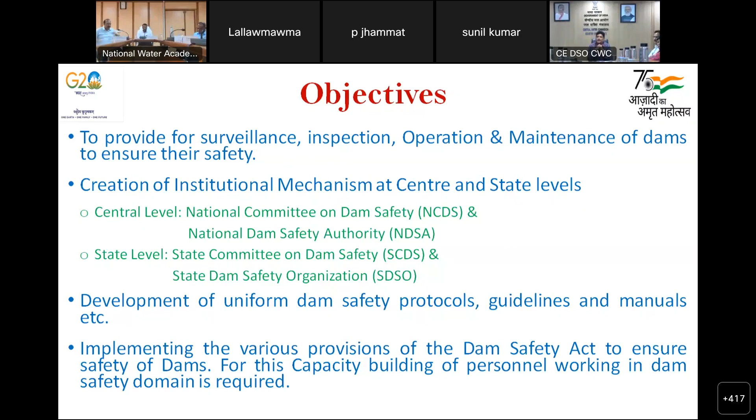And this will be required because we have more than 6,500 specified dams in the country. So the needs are also huge. So this being the objective, the preamble of the Dam Safety Act is simply: it's an Act to provide for surveillance, inspection, operation and maintenance of the specified dams. I will come to what is the meaning of specified dams. There is a definition in the Act which differentiates the specified dam and the non-specified dam.

Next, please. Basically, I want to take you through the Act very briefly, and the Act is available in the public domain; you can all access the Dam Safety Act 2021 on the net. However, I will tell you that there are 11 chapters and 3 schedules, and these 11 chapters have 56 sections. Chapters 1 to 6 are about the institutional mechanisms, both at the central level and at the state level, sections related to those.

Chapters 7 to 9 are about the various provisions which have to be followed, and the last 2 chapters, number 10 and 11, are miscellaneous provisions regarding offences and penalties, etc. And there are 3 schedules at the end of the Act. Schedule 1 is about the functioning of the National Committee on Dam Safety. Schedule 2 speaks about the functions of the National Dam Safety Authority. And Schedule 3 speaks about the State Committee on Dam Safety.

So now I will very briefly tell you which sections deal with what. As I told you initially, the first 6 chapters, that means sections 5 to 15, deal with the institutional framework. You already know that we have a 2-tiered institutional mechanism. Sections 5, 6 and 7 speak about the constitution of the National Committee on Dam Safety, its functioning and its meetings at the central level.

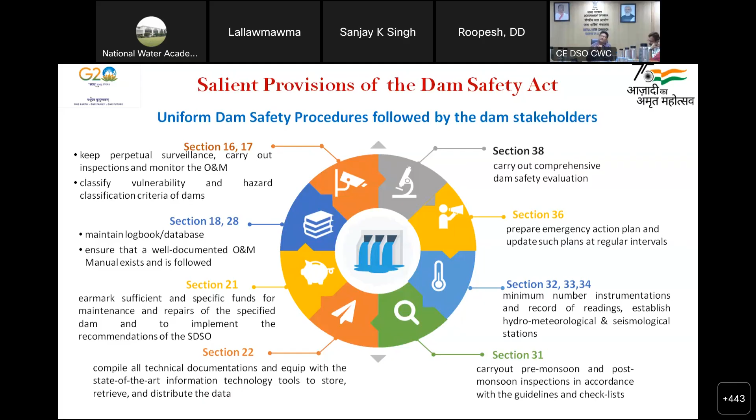And Section 38 of the Act says that there is a need to carry out comprehensive dam safety evaluation. The evaluation has to be done for all dams within the next 5 years, and thereafter it has to be repeated or updated as per the time frequency given in the regulation.

Now these were basically some of the provisions, and in order to implement these provisions, it will require some specific training needs. So, for example, in order to meet section 16 regarding surveillance and inspection, the dam engineers involved with the inspection should be well trained about the safety inspection procedures. They should know the checklist to be followed. They should be aware of the O&M manual.

What is the O&M manual? How is the dam to be operated? What is the rule curve? So the technical need is there. If you simply post someone and ask him to carry it out, it will be very difficult for him.

Similarly, section 17 says vulnerability and hazard classification criteria. See, it is a very difficult task. In the USA, the categorization of dams is done basically only on the hazard potential, meaning in case a dam fails, what will be the hazard caused by it. That is one thing. But our Dam Safety Act in India combines the two. It combines the hazard classification along with the vulnerability.

So we have to develop our own tools and then classify the dams. For this, a center of excellence has been developed at IISc Bangalore, and we will try to develop this criteria for India in future.

Initial filling of reservoirs: as you all are aware, many of the very old dams are functioning fine, but some new dams have trouble in the first filling itself. So section 27 of the Dam Safety Act says that before the initial filling of the reservoir for the first time, the agency which has designed the dam must prepare an initial filling plan.

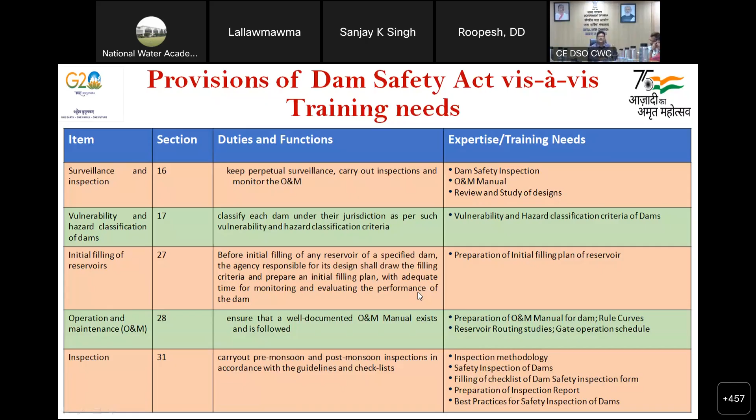So the next three sections are related to the instrumentation of specified dams. The minimum number of instrumentation, the type of the instrumentation, the location of the instrumentation, these are all given not only in the regulations, which are to be published shortly, but we already have guidelines under DRIP. I will share them with you in a later slide. So those dam engineers requiring knowledge about instrumentation should refer to our guidelines prepared by Central Water Commission under DRIP Phase 1.

Similarly, there is a need to have a hydrometeorological station in the vicinity of the dam for flood forecasting and discharge observation. So there is a training need so that these activities are also carried out properly by the concerned engineers. And finally, seismological instruments are also required to be installed. The Dam Safety Act mandates that all dams greater than 30 meters in height need to have a minimum number of seismic instruments. There is a guideline for that, BIS codes are also there, but we will soon be giving a guideline on the same by the NDSA.

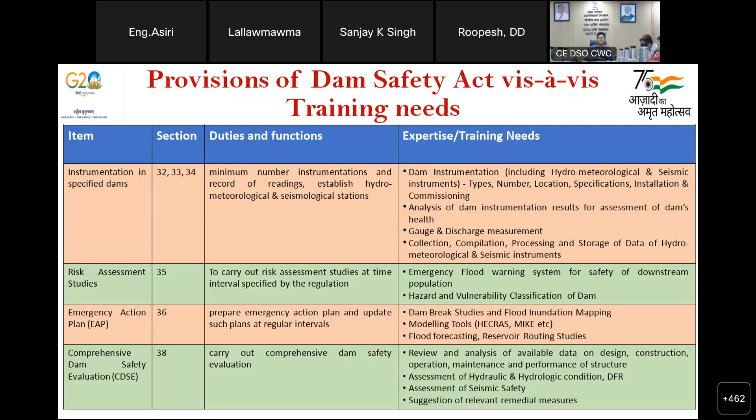Coming to the next, sections 41 to 54 are miscellaneous provisions related to punishment for offences and penalties, because the act is very serious. It's applicable all over the country. So anybody who tries to put an obstacle in the implementation of the act is liable to be punished. And we hope that sections 41, 42 and 43 are never put in use, because we want everyone to follow his responsibility to ensure dam safety. Further, the act has an overriding effect. So if there is any state law which is contrary to this act, this act will prevail.

Okay. So now section 49 gives the power to amend the schedules. Section 50 gives power to the central government to give directions. Sections 52 and 53 give the central government power to make rules, and section 54 is about the need to issue regulations by the National Dam Safety Authority. These are the various provisions of the Act.

And the next is applicability. The Act is applicable to the whole of India. The entire country is covered under this Act, and it covers all dam owners, whether the dam is owned by a state government or the central government, by a central public sector undertaking or a state public sector undertaking, or even by a private organization, or even by a municipal corporation. Whoever is the owner, for all specified dams anywhere in India, the Act is applicable. And not only to the specified dams, to the unspecified dams also.

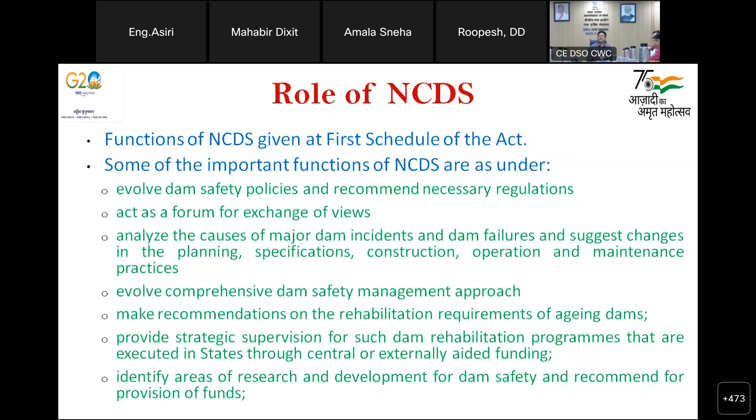And whenever a dam safety, dam rehabilitation improvement program, etc., is launched by the central government or state government through external funding, the NCDS can monitor its progress also and identify the areas needing research and development in the country in the field of dam safety. These are the broad roles, but if you want to go into details, you can refer to the first schedule of the Dam Safety Act.

And the implementing agency of the National Committee on Dam Safety is the National Dam Safety Authority. Here you can see an organogram. It is to be headed by a chairman, an officer of the rank of additional secretary, and assisted by 5 members: member policy and research, member technical, member disaster and resilience, member regulation, and member administration and finance. And there will be 4 regional offices to cover the entire country at the northern, southern, northeastern, and western zones. Next slide.

Currently, the NDSA is being manned on additional charge basis. The post of the chairman NDSA is currently held by member D&R of Central Water Commission. And of the 5 members of the NDSA, charge of 4 members is presently given to chief engineers of Central Water Commission. And the 5th member, member administration and finance, is with the joint secretary and financial advisor of the Ministry of Jal Shakti. I currently am holding the additional charge of member policy and research of the NDSA. Besides, the 4 directorates of Central Water Commission at Coimbatore, Pune, Guwahati, and Chandigarh are acting as the regional directorates of NDSA. This is the present setup.

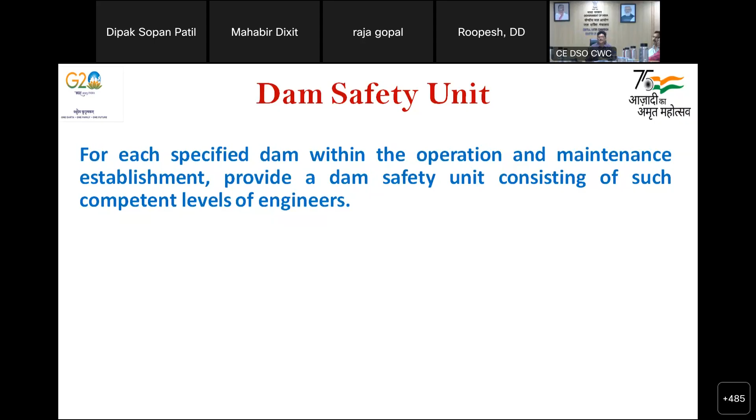So many states have already constituted and notified their dam safety units. Maharashtra has constituted more than 3,000 dam safety units across the state. Now, dam owners: I spoke to you earlier that all the large dams in India are generally owned by state governments. They can be through their water resource department or through the state electricity boards or even through municipal corporations.

Besides, there are central public sector undertakings like NTPC, National Thermal Power Corporation, National Hydroelectric Power Corporation, Damodar Valley Corporation, Bhakra Beas Management Board, Satluj Jal Vidyut Nigam Limited. These are some central public sector undertakings which also own large dams, and a few dams are also privately owned. But all the dams, whether owned privately or publicly, come under the purview of this act. Next.

Having said about the Dam Safety Act, now I will come to the dam rehabilitation programs. So the first National Committee on Dam Safety was constituted way back in 1987. That was to lay down uniform policies. And at the same time in India, the Government of India launched the first dam safety assurance and rehabilitation program in 1991. It was a small beginning.

It was a World Bank assisted program, and it had only 4 states at that time: Madhya Pradesh, Odisha, Rajasthan and Tamil Nadu. Only 33 dams were taken up for physical rehabilitation, but it was the beginning. In that, 33 dams were physically rehabilitated at a cost of 4.22 billion rupees. And it also laid down the foundation of institutional capacity building, providing training needs, physical rehabilitation works, preparation of documents, etc., strengthening the SDSO. The thing started from 1991 itself, much before the act came into power.

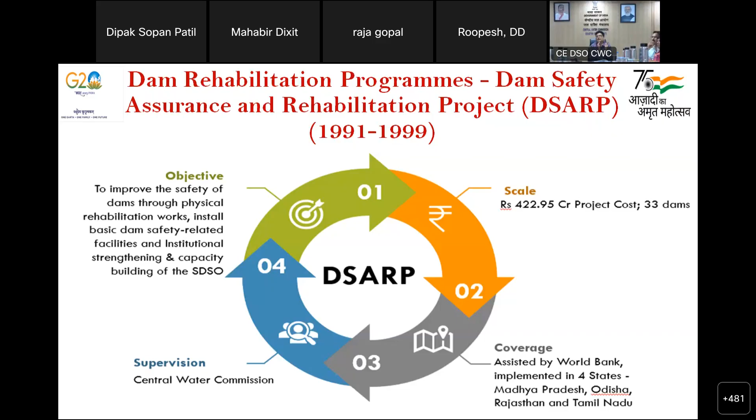The second program which was launched was the DRIP, that is the Dam Rehabilitation and Improvement Program, in 2012. It continued from 2012 to 2021, and the scale was much bigger. Here the budget was 25 billion rupees. It was assisted by the World Bank. And in this project, 223 dams were rehabilitated. These 223 dams were located in 7 states. And there were also central agencies, DVC and Central Water Commission, associated in this project.

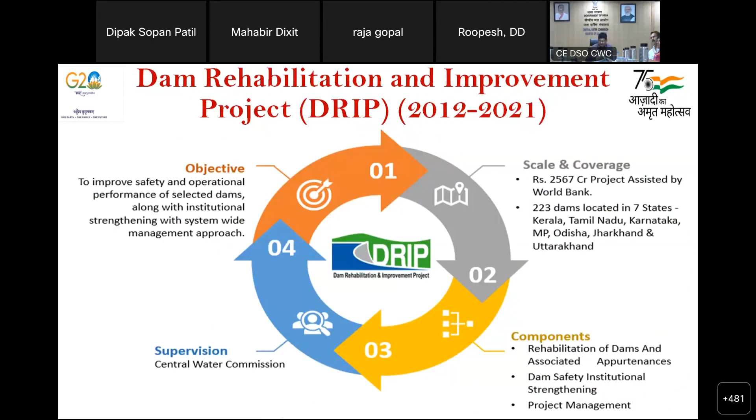And there were 3 components in this project. The first was the rehabilitation of dams and their structures. The second was institutional strengthening, and the third was project management. And the supervision of this was provided by Central Water Commission. And of course, the objective remains the same: to improve the safety and operational performance of selected dams along with institutional strengthening. And I will speak briefly, next please, about each component.

So 84% of the total cost of DRIP phase 1, that is 25 billion, was spent on component 1, which is related to rehabilitation of dams and their appurtenant structures. So here you can see in this picture, there is one dam, Sarvalur Dam, on my right side. An upstream geomembrane was provided on the upstream face to prevent the leakage. It is functioning fine. It had issues of huge leakage.

And another, you can see these Godbole type gates on my left side. It's Chandpata Dam in Madhya Pradesh. So that was also rehabilitated. And so around 223 dams were rehabilitated. And besides these, other key achievements in this component were that the emergency action plans of 217 dams and O&M manuals of 221 dams were also prepared. So much before the act came, we already started preparing the emergency action plans and the O&M manuals for specified dams. That was counted in component 1 of DRIP phase 1.

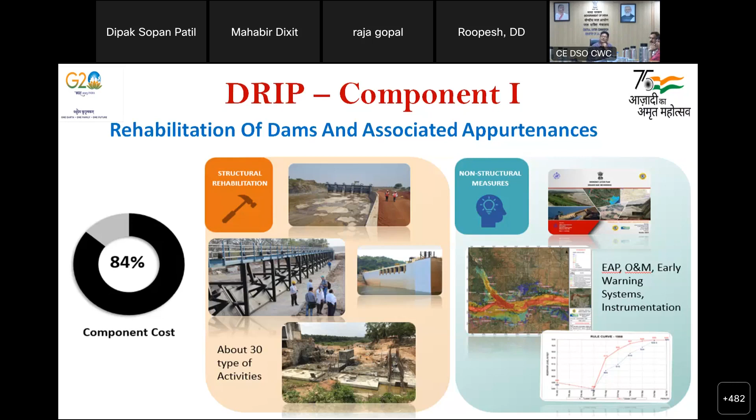Next, please. Component 2 was institutional strengthening. As I have been talking about, in order to implement the various provisions, there is a huge need of capacity building, not only of the engineers, but also the capacity building of institutions. So there was a component in DRIP phase 1 about institutional strengthening, and it conducted various trainings, customized trainings on various identified specific needs. And there were 13 guidelines, which I will share in a later slide. 13 guidelines were prepared during DRIP phase 1, which are still in use.

And DHARMA, in order to maintain an inventory of all the dams in the country and to have its salient features, all logistic details captured in a web-based tool. We have created this thing. Initially, it was built to take care of dams only under DRIP phase 1, the only 7 states, but now it has to be scaled up to cover the entire country.

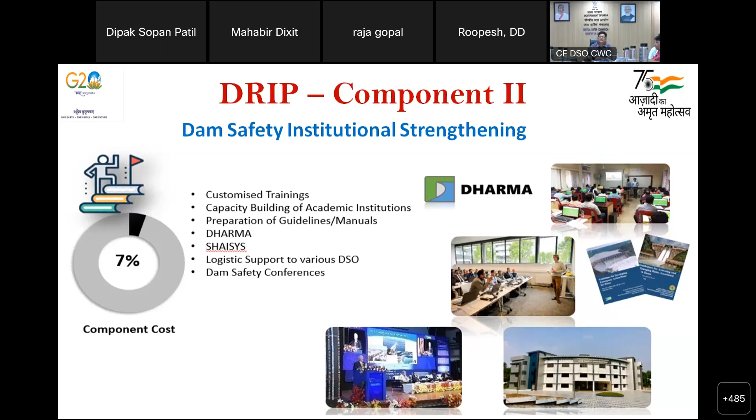And so the DRIP phase 1 also organized dam safety conferences, 2 international dam safety conferences, 3 national dam safety conferences, and other things related to institutional strengthening. And the third component of the DRIP was project management.

So project management is required at the state level as well as at the central level. So just in the same pattern as the Dam Safety Act, at the central level, there was a central project management unit which was monitoring the entire DRIP of all the states covered under DRIP phase 1. And for each state, there was a state project management unit to take care of all the procurements of goods and services, tendering, budgeting, auditing, inspections, etc.

So there was a project management unit both at the state level and at the central level to ensure the success of the project taken under DRIP phase 1. Similar type of activity is now under the Act, but now it is the State Dam Safety Organization and the National Dam Safety Authority catering the similar thing, but the thing started under DRIP phase 1. So these were the 3 components, and the DRIP phase 1 was quite successful. And the key achievements I will share with you.

What are the key achievements of the DRIP phase 1? You can see uniform dam safety procedures, 13 guidelines. Can we show them a list of the 13 guidelines? See these 13 guidelines: guidelines for developing emergency action plan, a manual for rehabilitation of large dams, guidelines for instrumentation of large dams. These 13 guidelines were prepared and they are all available in the public domain at the website damsafety.cwc.gov.in. Any one of you who is interested can go to this website and download any of the guidelines. They provide you the basic things.

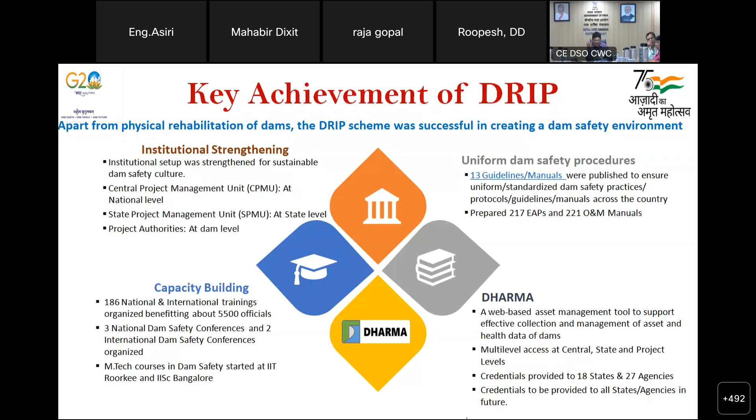And seeing the success of the DRIP phase 1, as soon as the DRIP phase 1 finished, the DRIP phase 2 and 3 was launched in 2021. In DRIP phase 2, each project is of 6 years duration, so it should be 12 years, but there is an overlap of 2 years. So the period is basically from 2021 to 2031. Its scale is much larger than DRIP phase 1.

So here the budget is 102 billion Indian rupees, with World Bank assistance of about 7,000 crores or 70 billions out of the 102 billions. There are 19 states. In DRIP phase 1 there were 7, and now there are 19 states and 3 central agencies. The 3 central agencies are Central Water Commission, Bhakra Beas Management Board, and Damodar Valley Corporation. And 736 dams are proposed to be rehabilitated.

All the components are same as the DRIP phase 1, only one additional component has been added, and that is component 3, which is the incidental revenue generation for sustainable operation and maintenance. We have talked that many times the dams face problems because of inadequacy of funds. So they have thought of an innovative mechanism that if we can generate some earning from the dams, and the state government policy should also support that, then part of the revenue earned can go back to dam safety to ensure that the dams are perpetually maintained in a proper way. That is component 3.

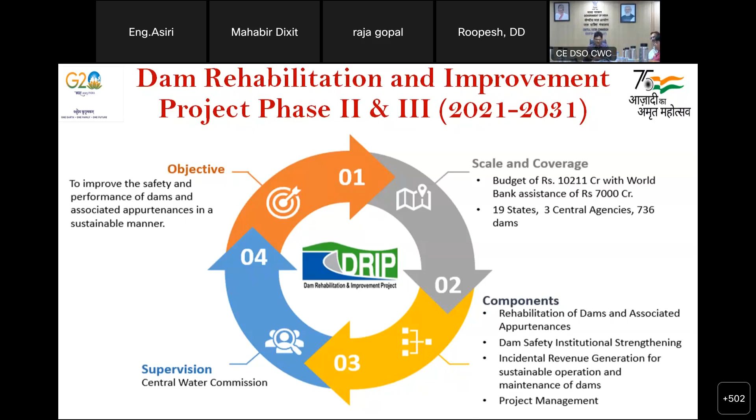So here also for component 1, we intend to provide the major share of about 86%, the other 3, 4, 5 and 5%. So this is the broad outlay of DRIP phase 2. It has already started. These are the components, component 1, 2, 3, 4. As I told you, 86% to component 1, 5% for component 2, 4% for 3, and 5% for component 4. All these funds have been allocated, but these are loose and they can be changed.

Next. The current status: the loan agreement was signed in 2021, and it became effective in October 2021 by the World Bank. $500 million is the loan for DRIP phase 2. Out of $500 million, $250 million is being provided by the World Bank, and the remaining $250 million by the Asian Infrastructure Investment Bank. The loan with the AIIB was signed in May 2022, and it became effective in December 2022.

Out of 19 states, and we are still in the second year of DRIP phase 2, 14 states are already on board. These are Gujarat, Kerala, Maharashtra, Madhya Pradesh, Manipur, Meghalaya, Rajasthan, Odisha, Tamil Nadu, Chhattisgarh, Karnataka, Uttarakhand, UP and West Bengal. And 4 more states are yet to fulfill the World Bank readiness criteria, and they will also join: Punjab, Andhra Pradesh, Telangana and Jharkhand.

Besides, 2 central agencies, BBMB and DVC, and the state of Goa are almost ready to join. Very shortly, we will have them also on board. So then 14 states will become 15, and with the joining of BBMB and DVC, we will have 3 central agencies. So 15 states and 3 central agencies very shortly, and only 4 states are yet to join. This is the current status in the second year of DRIP phase 2.

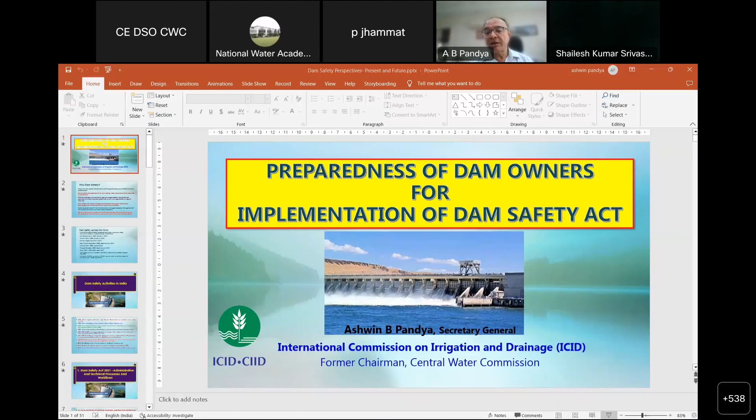So let us get ahead with our topic today, that is the preparedness of the dam owners for implementation of the Dam Safety Act. Now, as you all know, and as has been discussed just now, the dam safety program in a coordinated way has received a very great fillip from the Dam Safety Act enactment. Once the Dam Safety Act came into being, the awareness increased manifold, and because of the increased awareness and also the financial support from various programs, dam safety is now receiving sufficient attention, and it is not a day too soon.

We are at the cusp of climate change. Already we are seeing the kind of extreme weather events that are happening. And let us be frank, we have not designed our dams for these extreme events. We hardly had an idea of the kind of intense storms that may end up impinging upon the catchments, and the kind of catchment responses that you will get at even the medium and small dams.

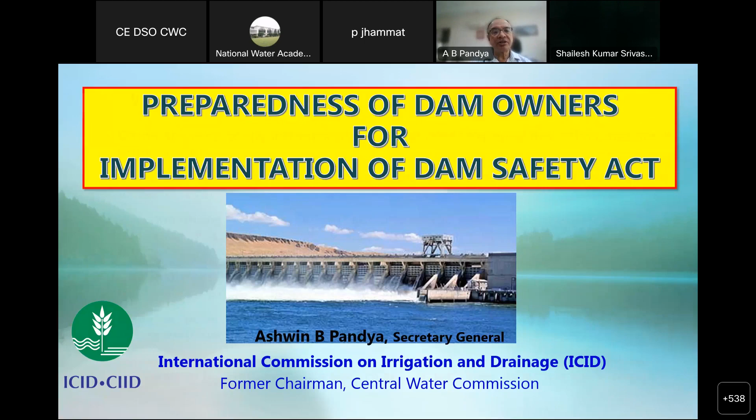So it is high time that we start looking at dam safety as a discipline and implement the provisions to the extent that we can make our dams safe. If you don't have the dams, you will not have water conservation and you will not have water security. So conserving and maintaining our dams is going to be very, very important. Why dam safety? Because they are very costly infrastructure built at a very great expense and effort and are a public asset. The infrastructure has great value in the economy of the country.

A very interesting phenomenon happening presently is that when India is looking at its food security, the world is buffeted by issues of food security due to various other geopolitical conditions. And the prime reason that India could achieve water security and food security has been the contribution that the dams made in providing us with assured irrigation.

So maintaining these assets is something that we need to be very, very serious about. We can't neglect them. We can't allow them to deteriorate. Even though there is an issue, because we are not considering water as an economic commodity, and because of that,

many of our irrigation dams especially are not receiving the kind of attention that they should receive from the point of view of funding and point of view of attention consequent to the availability of the funding, which is really going to harm the country in a very serious way when we move forward, and we will have to face the kind of extreme climate situations that we are likely to face in near future.

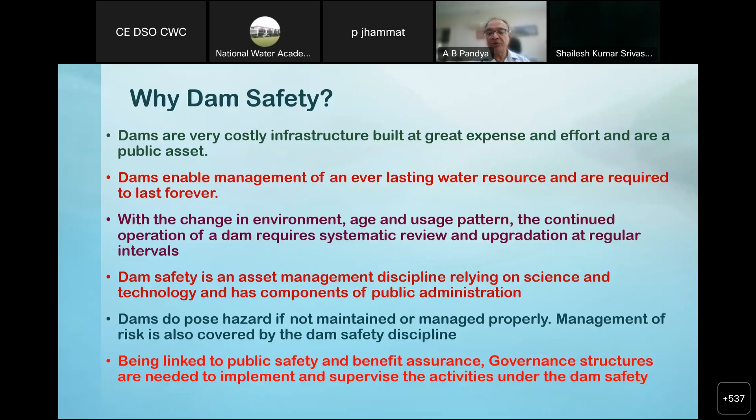There has been a very important activity on dam safety all across the world. People have become aware at various times, and people have enacted these kind of dam safety acts at various places. Some of the better prosperous countries were able to provide a substantial kind of inputs, whereas in case of the other areas, the act has been there, but then we haven't been able to do much about it.

Just one moment, why has this annotation business come up? Can somebody stop this annotation? Because of this annotation thing, I'm not able to move the slide also. I will stop sharing first. Let me. We will share from our end if you want. Yeah, let me first stop it. I am in a meeting, Srivas. I'll talk to you later.

So now this is the history which we will not repeat, because we have already gone through this probably with Vijay Saran's presentation. So we need not really repeat this. We now have the dam safety legislation, and now let us get to the brass tacks of how the dam safety legislation is required to be implemented.

So the first and foremost thing is that it is an act which is not exactly a kind of an enforcement, but basically laying down the procedures and standards in a manner that the dam safety program gets implemented within the state. So it is more of a guideline, even though it has been put in the form of an act in order to make it legally enforceable.

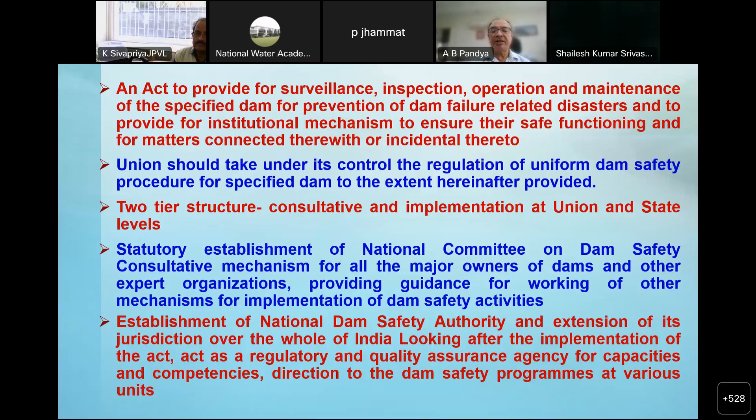So the issues are that the statutory establishment of the national committees and also the state committees, and providing them with the teeth in the form of the National Dam Safety Authority and also at the state level, is the key aspect of this act. Now, the responsibility levels for dam safety are multiple, because it's a public asset and its disaster has an implication which can travel much beyond even the boundaries.

The responsibility at various levels has to be fixed, and the prime responsibility has been fixed on the owner of the dam for implementing the required procedures and practices. Everybody else is there to help, but there is the requirement that the owner cannot escape that responsibility, because the owner is deriving the economic benefits out of these particular dams.

Now, whether the owner is discharging their duties or not, the states have been entrusted with the supervision and enforcement functions for implementing the provisions of the Act. So the support in the form of a state level dam safety committee is provided, wherein you can not only discuss the administrative issues, but also discuss issues of a technical nature, which may require interaction with other authorities and agencies, and require coordination.

So this is the crucial aspect of the responsibility sharing. And then at the national level, the union also has to have powers in order to take action in respect of dam safety, because many of the dams are interstate in nature. Quite a few of the dams are even transboundary in nature. And being interstate is again a kind of an internal transboundary situation.

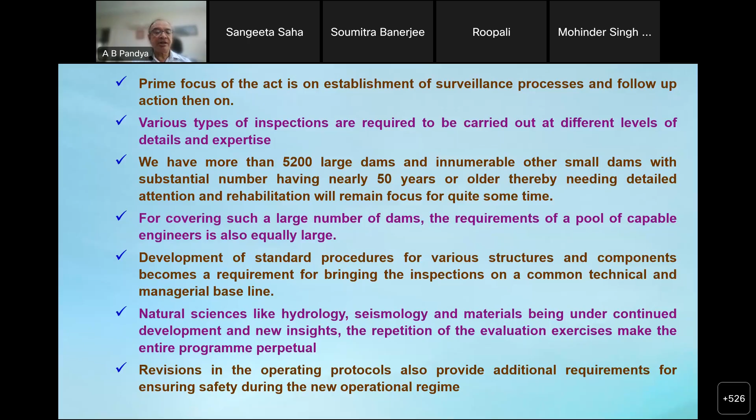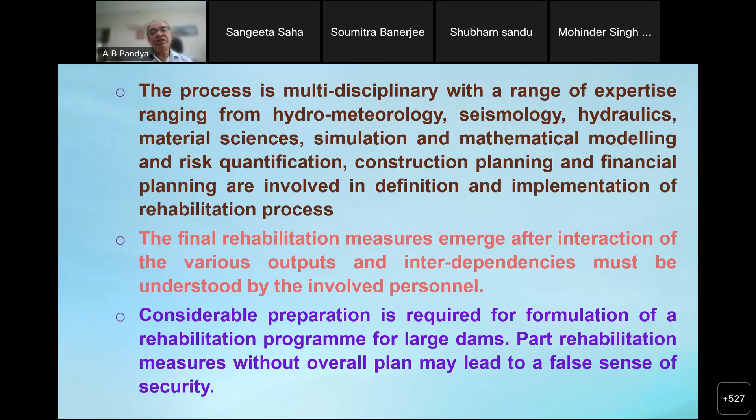Because if you have to implement this kind of iterative activity, then the financial and the logistics guys also will have to be in step with you. Otherwise, you may be deprived of the resources.

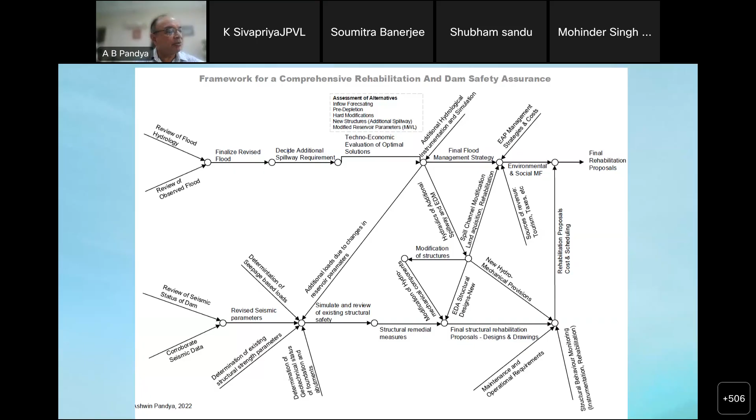And what I find is that the emphasis at the dam safety review panel level inspections is to get a final recommendation. Now, many a times your recommendations cannot be final, because the situations that are given to you are not complete. You do not have any idea of what is going to happen if a particular kind of a recommendation is made.

So the one-shot approach that currently goes on has an issue, and that needs to be really understood, that the personnel who are in charge of review will have to undergo this kind of an iterative process, and you have to be told about what are the outcomes of these iterations, and then based on that the decision making can be supported. Otherwise, you give a prescription, later on somebody will comment why he gave that, why he did that, there was no need to do this or no need to do that. All kinds of wisdom will then generate in hindsight, and that may affect the overall outcome.

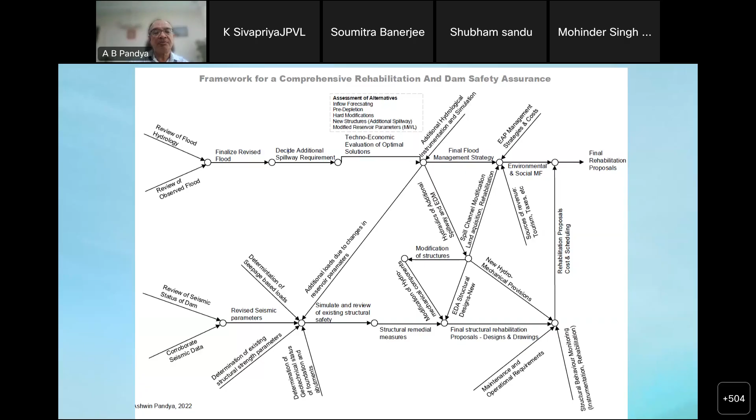So this is an issue that needs to be really looked at from the preparedness from the dam owner's point of view, because the dam owners have to be ready for this kind of a process. And many of the times I am finding that the dam owners are not really ready for this kind of a process. They are interested in getting the things done, and maybe just having an inspection, go to a report writing process, and then start preparing estimates based on that report. So this is something that we feel we need to really look at very seriously.

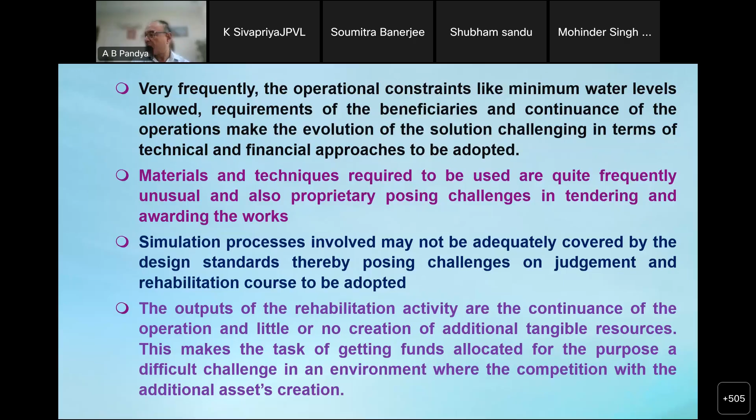Another major aspect is the institutional framework required for dam safety assurance at various levels. Our institutional frameworks, especially in the context of our emphasis on dam building, we have had a very difficult time in setting up the institutions. The institutions are the ones which will eventually make dam safety a success.

One issue that has come up is that in the process of the expansion of our networks, the personnel strength has suffered. There have been some vicious economic considerations why the personnel strength suffered, because we were not able to generate adequate inputs out of the revenue that is being provided out of these dams and these structures. And then in the process, since we forgone that revenue, we also started to forego the expenditure. And the situation now is that there are several hundred vacancies in every water resources department, and such vacancies exist even at the central government level, or even at the PSU level. So institutions can be built, and institutions will require persons, and persons will have to be really managed and engaged.

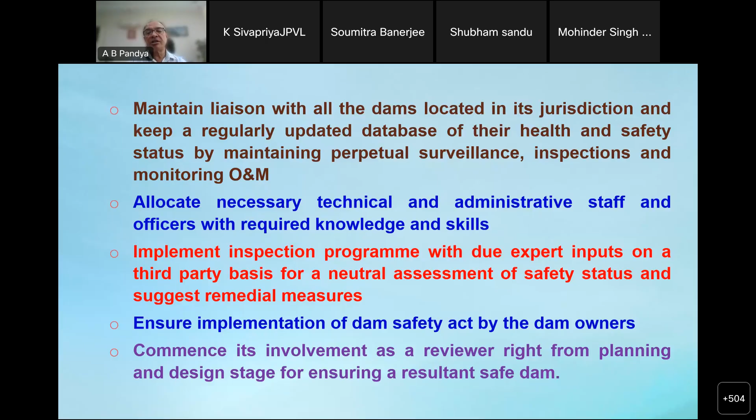Now let us look at the central level framework. The central level framework is something that we need to also look at, because we currently,

I'll reshare this because somehow this has got frozen. Okay, now it has worked. Yeah.

Standards development is again a difficult issue, because you have to be very deeply aware of the field in which you are operating and in which you are going to recommend a standard. If a wrong standard is put in, and because of that any wrong decision gets generated, then the eventual legal responsibility may get transferred to the central level also, even though you may not be owning the dam. So it's a great responsibility, a responsibility which cannot really be ignored. So development of the standards and guidelines is quite important.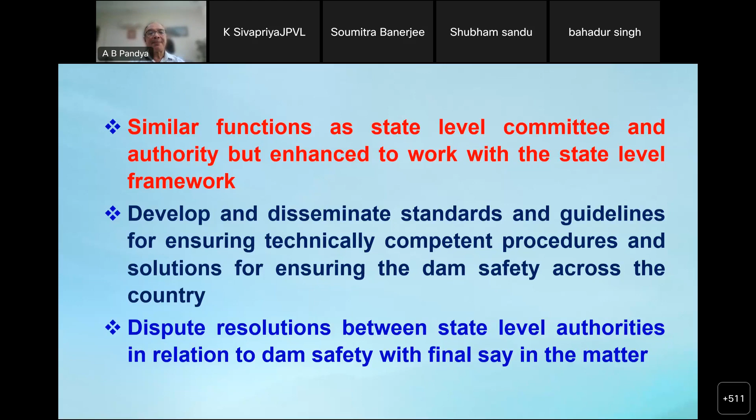We are going to have dams in cascade. These cascades are stretching over the states, and wrong decisions at one location may affect the other locations in a bad manner. So the interstate aspects of dam safety management are also quite important, and they will willy-nilly have to be resolved at the federal level, because you do not have an interstate mechanism where this can be resolved by two competing parties. So this is another part that we will need to look at.

So when we look at all these issues, we come to this particular area: we need capacity at various levels, personnel as well as knowledge capacities. We did discuss the personnel capacities, but the gaps in knowledge capacities are equally glaring. When you are designing a new dam, you have a good number of standards, and these standards have generally been tested over a long period of time, because we have a very good dam building history and good developmental back support. But when it comes to rehabilitation, we haven't got that kind of knowledge base and capacities.

Like very limited number of institutions may be there in the fields of, say, hydrology or engineering seismology, concrete technology, geotechnical engineering, numerical modeling, and hydromechanical structures. Very often we find that certain even fundamentals are also not really properly known at the field level. So the capacities are required. The capacities also are required from the point of view of the fact that some kind of application of these technologies into the rehabilitation processes require a different kind of an approach.

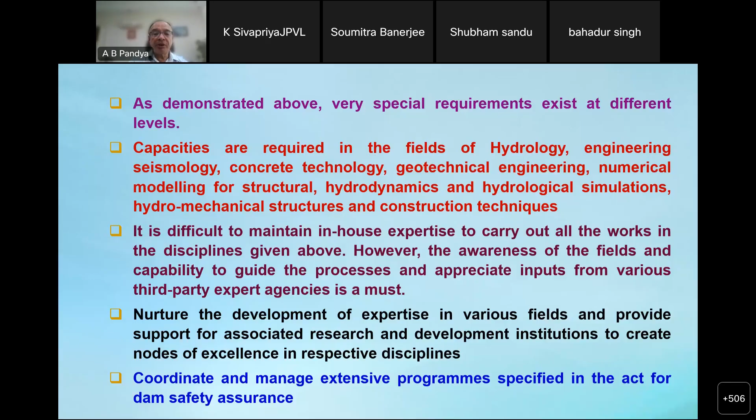In many of the states now, you do not have any new dams coming up. And this has been the situation for 10, 15, 20 years. So the last persons who built these dams have retired. Many of them who used to advise you have even left this world. So the continuation of the expertise and capacity building is a very important part. That is where the role of experienced personnel will also come in. Whatever expertise is available will have to be roped in, coordinated and brought in a consolidated form. And there has to be opportunity for those experts to devolve their knowledge into the succeeding generation.

It's very important. If we do not do this, we may land up in a situation where we have to reinvent the wheel. But we are also at this kind of a cusp. Many times I am finding during my association that certain basic capabilities are also not readily available.

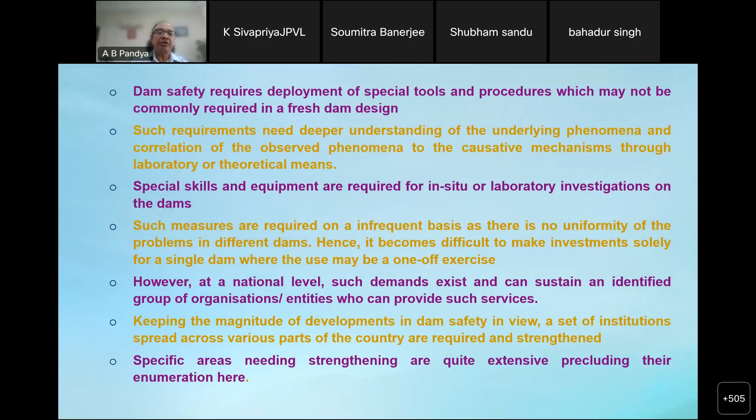So this is an issue that we need to work. There, the role of specialized organizations and entities is also very important, because the organizations will be the ones who will be able to nurture and develop this kind of expertise and this kind of capacities. So this is an important part.

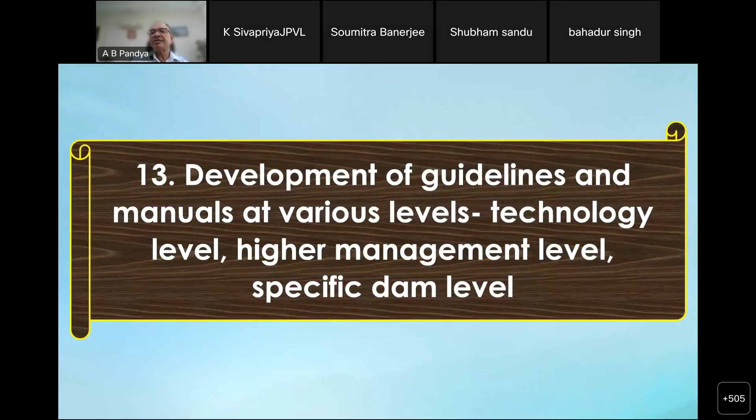Consolidation of the knowledge will also basically result in the development of guidelines. And this development requires a consolidation of the past experience. You have to not only look at the personnel who are available to you in the office, but you also have to look at the personnel who are not available to you readily in the office, but who have been performing this kind of work earlier and have been observing the fruits of their activities, so that the guidelines are able to provide for such facilities and provide for such eventualities.

A good number of manuals have come up. Some of the manuals are really quite good. They have provided a very great amount of knowledge and information. But still, we have to look at the kind of guidelines that are available or that are generated at the international level, and how these guidelines are generated.

Because one thing is there, when you look at the international experience, the problem is that India has got a different kind of agroclimatic and geological context than a country which may be more advanced, but having a different kind of context. So it is not actually even possible to completely translate that guideline into your own day-to-day guideline for the country. So a very comprehensive study and a very sustained effort is needed.

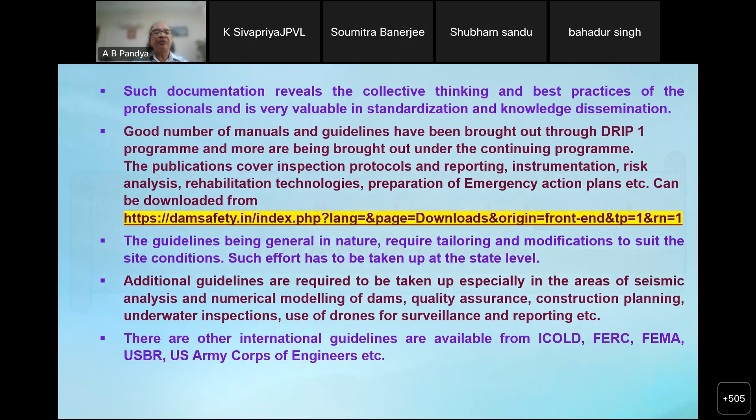Here, the issue of promoting the academic institutions to continually work on these kinds of aspects also becomes very, very important. Because if there is a continuity that has to be maintained, and simultaneously a quest for new knowledge is required, then this is also a very important aspect that we need to really work on. So that's why I skipped this a little ahead. But this is the fact that continuity is a very important aspect in all water resources activity, and quite so in case of dam safety.

Even in water resources activities, you realize that many times the decisions that were taken 70 years, 80 years, 100 years before today are required to be re-evaluated today in a different context. And then you have to know why the decision was taken at that time in a particular manner. Otherwise, you are not able to really appreciate the decision, or to really understand the implications of changing the decision. So here continuity is a very, very important aspect. Now, this is as far as the policy and planning is concerned.

But continuity is also important at the dam operators level. At the dam operators level, there are issues like floods. Now, you have a situation where you are posted on the dam, and you may spend your 5 years there, you may spend your 10 years there, and not a single flood passes. So you become kind of complacent. But then one fine day, suddenly you find that you are facing a probable maximum flood. What will you do?

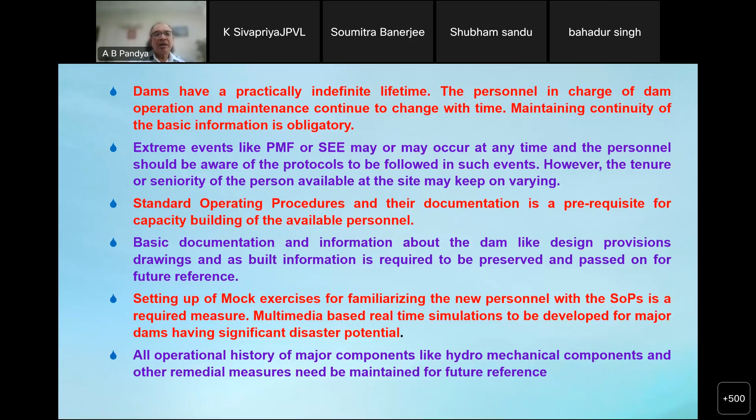The other aspect of preparedness is that this requires a kind of understanding in the administrators and in the financing and political areas. Ultimately, it's all about money. The purse strings of the overall things are going to be controlled at some level, and there the peculiar requirements will have to be understood by them.

If you are not able to make them understand that requirement, then you may not get those resources which you are really asking for. And if you do not get the resources, you will not be able to perform your work. It will lead to some kind of a problem, and later on there will be a sort of blame game.

So making your needs understood also requires a certain amount of capacity in the person, especially in terms of fundamentals, and in terms of supplementing the particular proposal with supporting evidence or a supporting argument, so that the person sitting on the other side of the table is capable of providing you with those things.

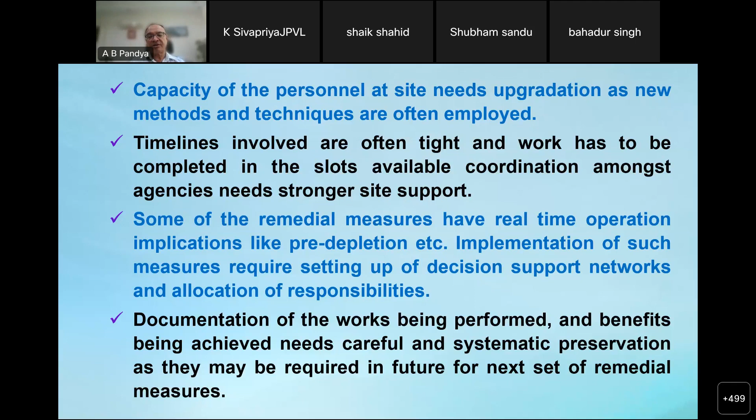In such a situation, the normal rules of fair market competition, which are also part of your procurement processes, will have to be tweaked in a certain way. So those things are also something that you have to really struggle with. Those areas require skills to see that you get what you want, and you don't land up with something you never needed.

And that is where we need to be continually upgraded. Innovation is happening in the world at every point of time, and innovation in different, unrelated fields may have an implication on your field. For that, cross-disciplinary understanding is required in at least a limited number of persons, so that the benefits can be brought to the dam safety field. At times things are not directly related. So that's an important thing.

And then the whole country will have to work in unison to carry out the dam safety assurance works, and that will have to be taken up as a part of the overall nation building program. Nation building doesn't simply mean building; it will also require you to maintain that building. That's an area which is not yet fully understood in many locations. We are so gung ho about building new things, and we are not very careful about what we are doing with those things in the long run.

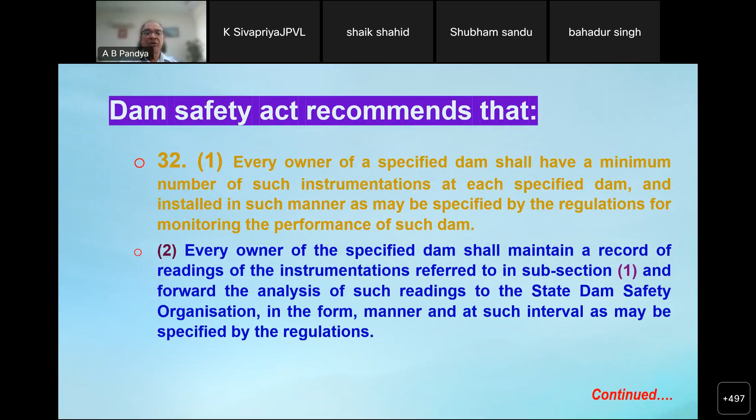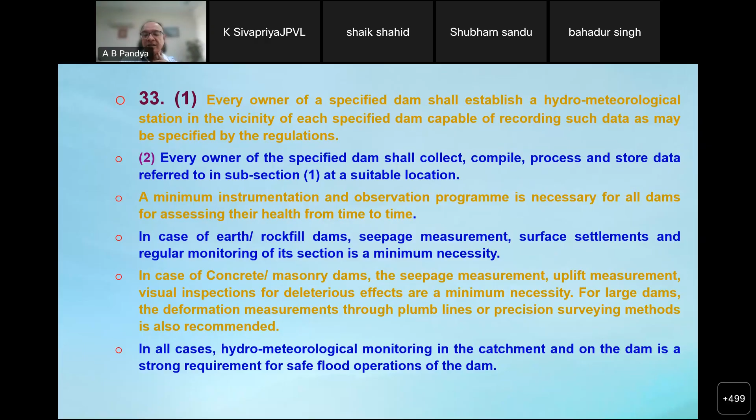So these are the recommendations that the owners should be very carefully looking at. With those recommendations, we need to see how the factors we discussed in the previous slides will have to be brought in, so that these recommendations are implemented in their true light and spirit.

So in a nutshell, this is the overall situation in which we will have to implement dam safety assurance, and a lot of work and effort is required. We need to work very hard to achieve the ultimate goal of water security, because dam safety is not something small. Dam safety has a direct implication on water security.